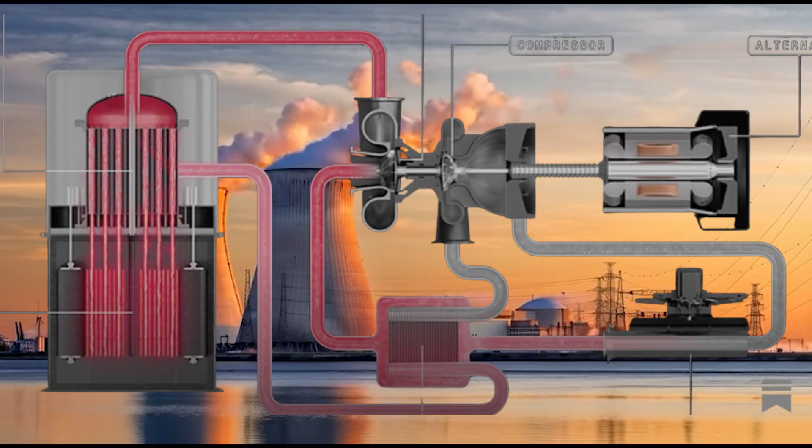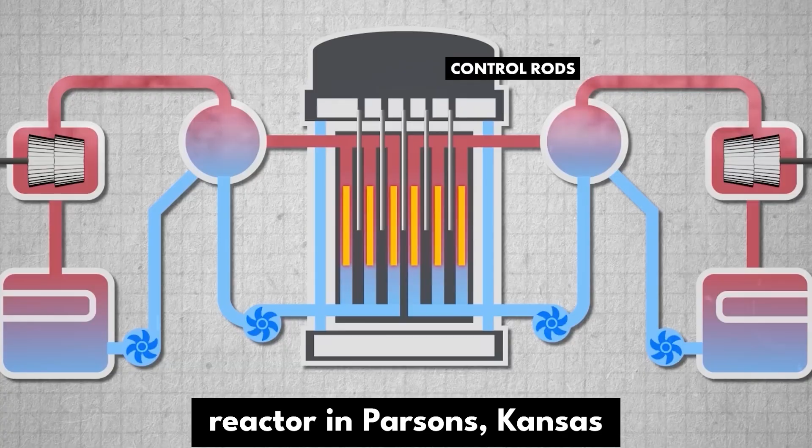Deep beneath the flat plains of Kansas, a quiet revolution in nuclear energy is taking shape. On December 9, 2025, Deep Fission officially broke ground on what is being called the world's deepest reactor in Parsons, Kansas. At first glance, it sounds like science fiction, a nuclear reactor buried one mile underground. But this project isn't about theatrics. It's about solving some of the hardest problems in energy: safety, scale, and delivering power to the places that need it most.

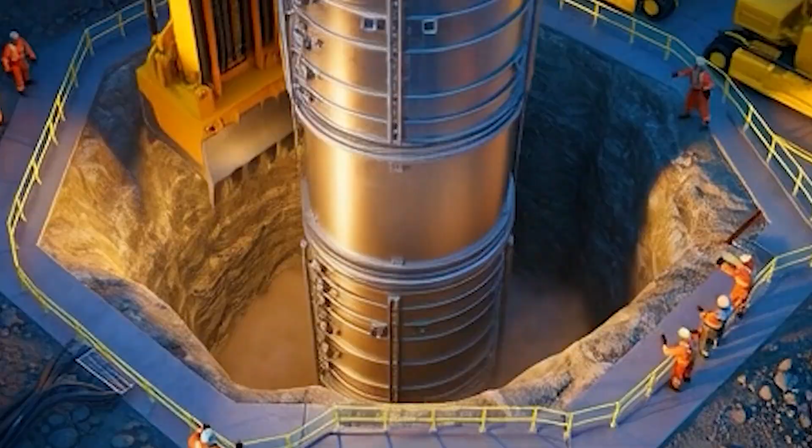The concept behind Deep Fission's borehole reactor is radical yet elegant. Instead of building towering above-ground facilities, the reactor will be constructed in a vertical shaft drilled a mile deep into the earth. This subterranean approach provides natural shielding from radiation, dramatically reduces the need for complex containment structures, and leverages the surrounding geology for passive cooling. Essentially, the planet itself becomes part of the reactor's safety and operational infrastructure.

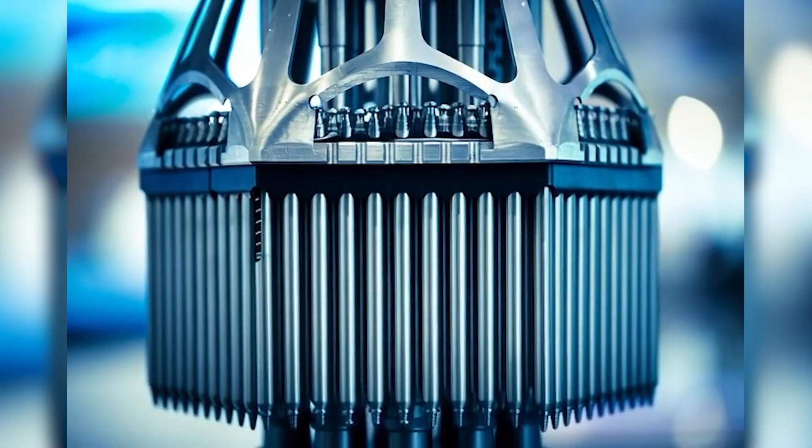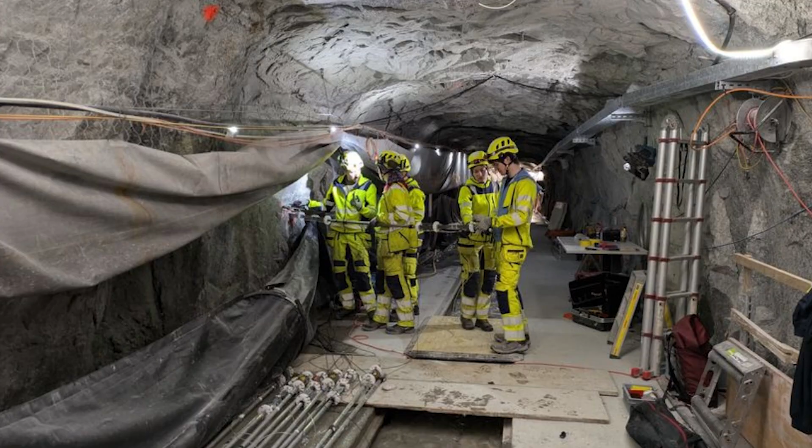This isn't just a theoretical exercise. Deep Fission's Parsons site represents a pilot project, the first step toward a much larger ambition. Their strategy revolves around modular, scalable borehole reactors that can be replicated across multiple sites. By going underground, they reduce surface risk, minimize land usage, and address one of nuclear energy's biggest public perception challenges: safety.

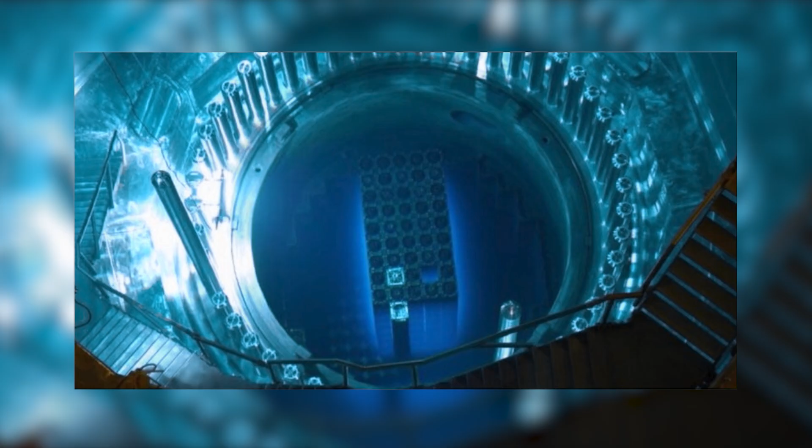For communities wary of traditional reactors, a mile-deep installation is both reassuring and practical. But safety is just the beginning. Deep Fission is already thinking like a utility of the future. The company has reportedly secured a pipeline of letters of intent totaling 12.5 gigawatts with AI data centers, signaling a new kind of customer for nuclear power.

Data centers are voracious consumers of reliable 24/7 electricity. Their operations cannot tolerate grid instability, and renewable sources alone often can't guarantee the consistency. Deep Fission's borehole reactors are designed to fill this gap, delivering constant, carbon-free power to facilities that demand reliability above all else. The underground design has multiple technical advantages.

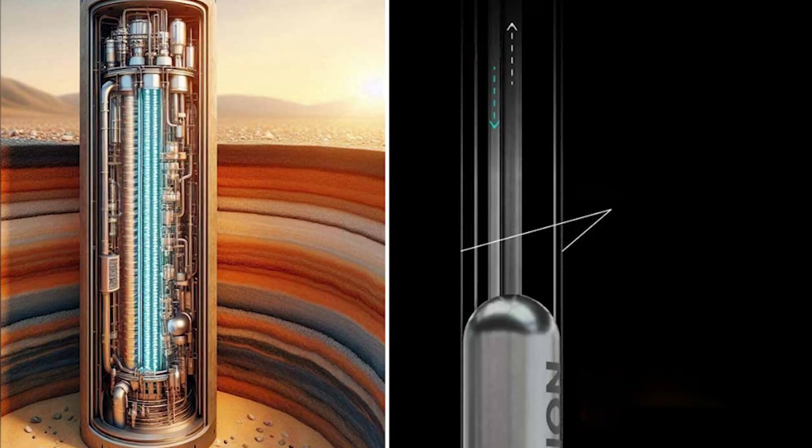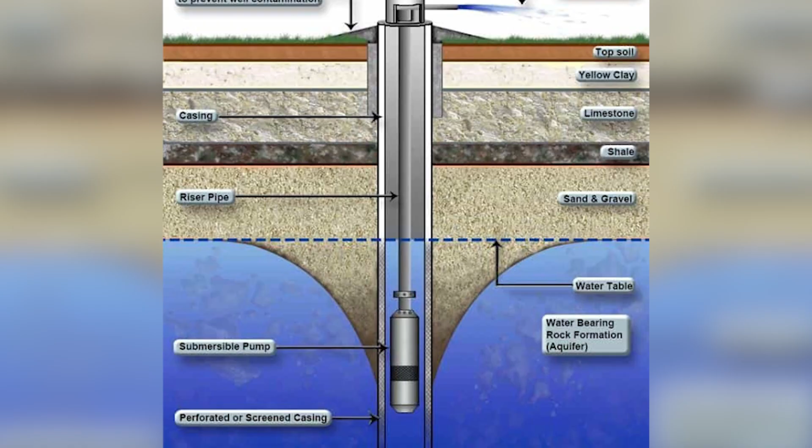By building vertically, the company reduces the complexity of heat management. Gravity and natural rock conduction assist in cooling, and the depth provides additional pressure containment, which simplifies reactor engineering. Components can be modularized and lowered into the borehole sequentially, allowing for phased assembly and easier maintenance cycles compared to traditional reactor construction.

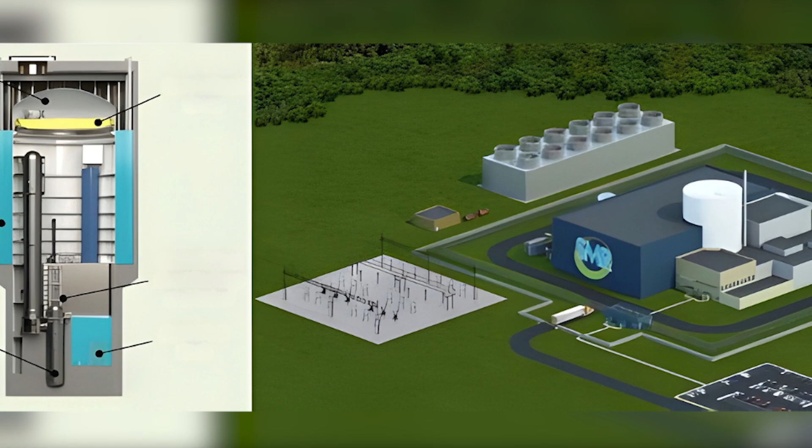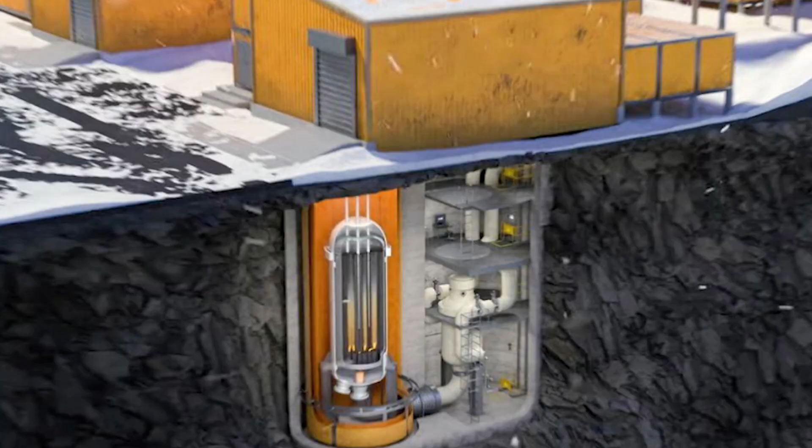Deep Fission's pilot reactor in Parsons is more than a single experiment. It's a proving ground for a potentially global energy model. If successful, these deep borehole reactors could be deployed in regions where surface space is limited, population density is high, or safety concerns make conventional reactors politically unfeasible. By burying the reactor, the company essentially creates a self-contained nuclear system, isolated from the risks of weather, accidents, or surface-level human activity.

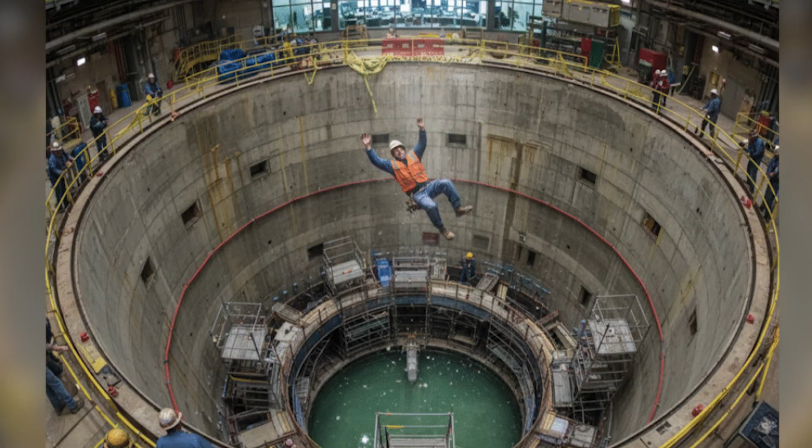The timeline is ambitious. While a mile-deep reactor presents enormous engineering challenges, the company's phased approach, starting with a pilot unit, allows them to refine the technology, demonstrate operational safety, and build credibility with regulators and investors. This is a critical step because nuclear projects live or die on their ability to navigate regulatory approval. Deep Fission's underground approach may streamline certain safety certifications while adding new complexities for geotechnical assessment.

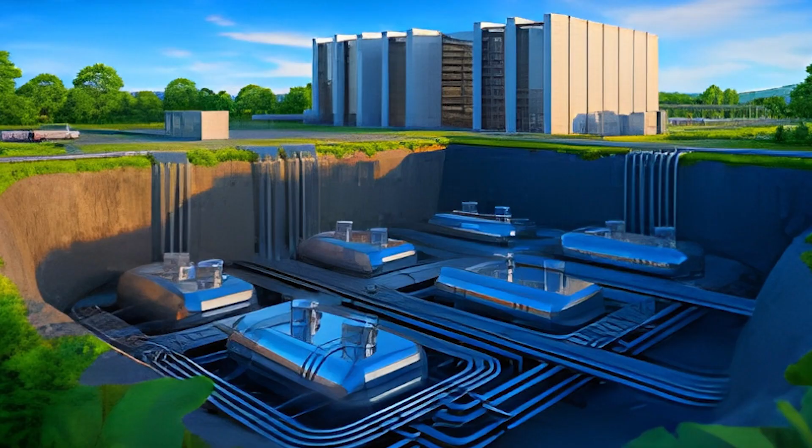One of the most interesting angles of this project is its alignment with AI infrastructure. Data centers are increasingly looking for on-demand, carbon-free power solutions. Solar and wind can't reliably deliver continuous, high-capacity electricity, and traditional reactors are slow to deploy. Deep Fission's underground modular reactors could offer AI companies a near-instant solution to scale their operations sustainably.

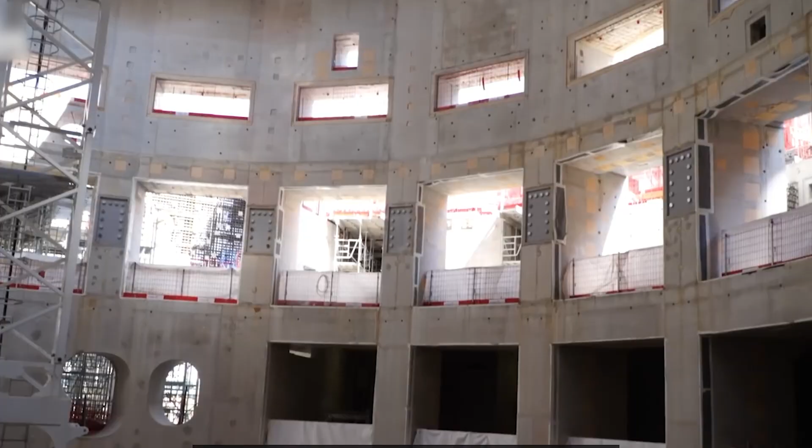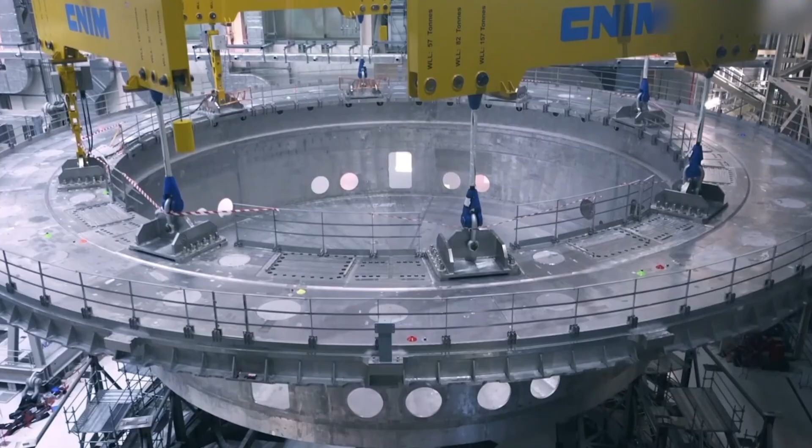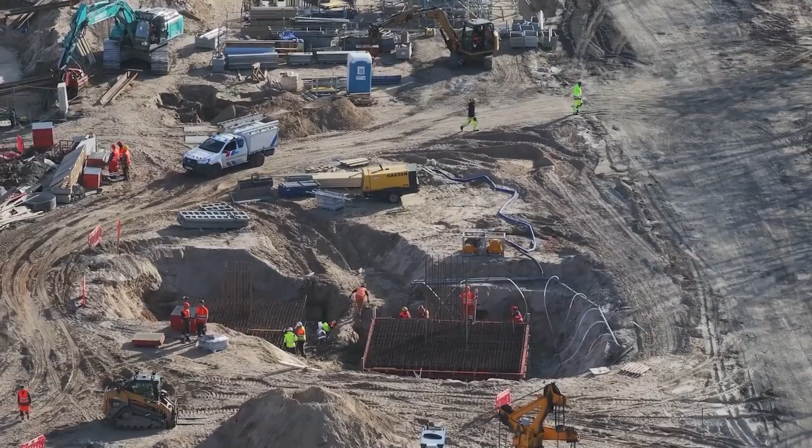The 12.5 gigawatts in letters of intent isn't just impressive. It signals a market-driven validation of this unique approach. From a financial perspective, the Parsons groundbreaking and the subsequent pilot deployment show that investors are willing to fund truly innovative nuclear strategies. Unlike surface reactors that compete for land, permits, and public approval, the underground model could accelerate deployment timelines while offering enhanced safety and lower operational risk. That combination is compelling in an industry historically burdened by skepticism and delay.

The borehole method also introduces operational efficiency. Modular components can be pre-tested above ground, then lowered into the shaft and connected systematically.

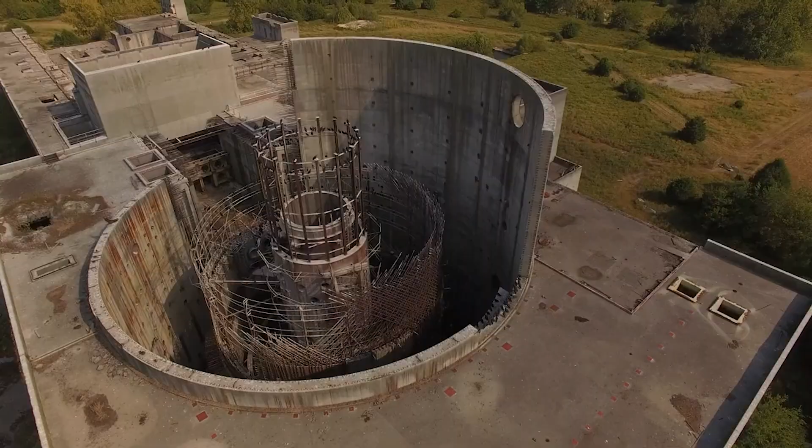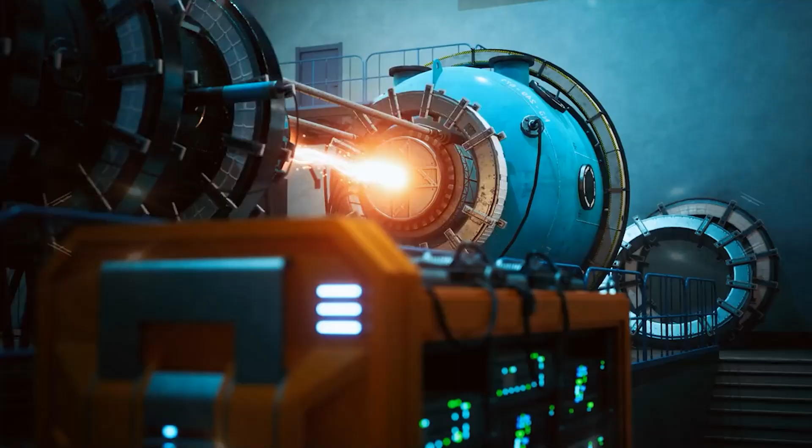This reduces assembly errors and allows for rigorous quality control at each stage. Traditional nuclear construction suffers from on-site customization and iterative adjustments, often leading to multi-year delays. Deep Fission's strategy seeks to eliminate these inefficiencies by turning reactor construction into a precisely orchestrated industrial process.

Another advantage of burying reactors underground is resilience. Surface infrastructure is vulnerable to weather events, natural disasters, or even targeted attacks. A mile-deep installation inherently mitigates these risks, offering not just safety from radiation, but security and reliability. For high-value customers like AI data centers, that added layer of resilience is extremely attractive.

It's also worth noting the symbolism of Kansas in this story. Traditionally, the state isn't associated with cutting-edge nuclear research, but Deep Fission has chosen Parsons for its geology, regulatory environment, and access to critical infrastructure.

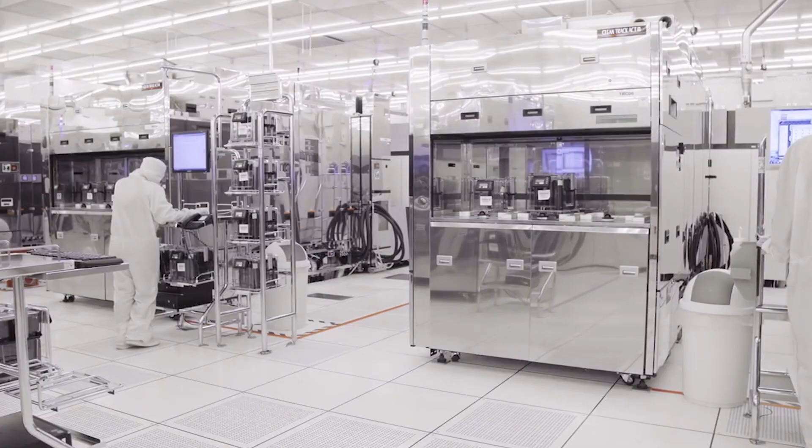This highlights a growing trend. Innovative energy solutions are no longer confined to coasts or tech hubs. The energy revolution is happening where conditions are right, not just where headlines are made.

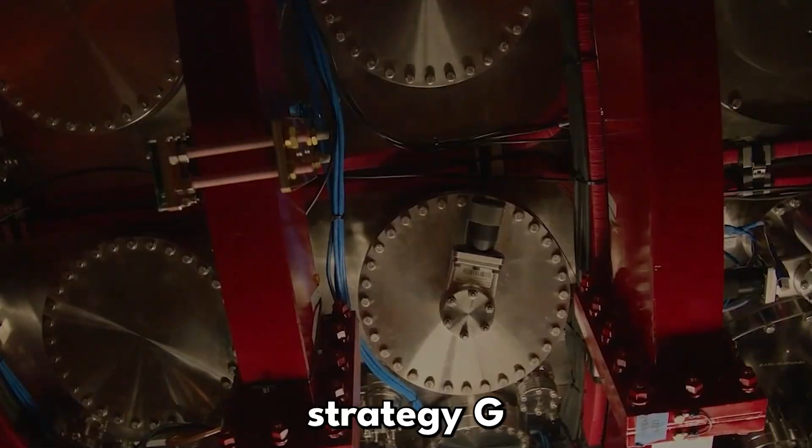For the broader nuclear industry, Deep Fission's strategy could be transformative. By demonstrating that reactors can be safely constructed underground using a modular approach, they may redefine public perception and regulatory pathways. Communities that were hesitant about traditional nuclear projects may be more receptive to borehole reactors, opening doors to deployment in previously off-limits areas. Of course, challenges remain.

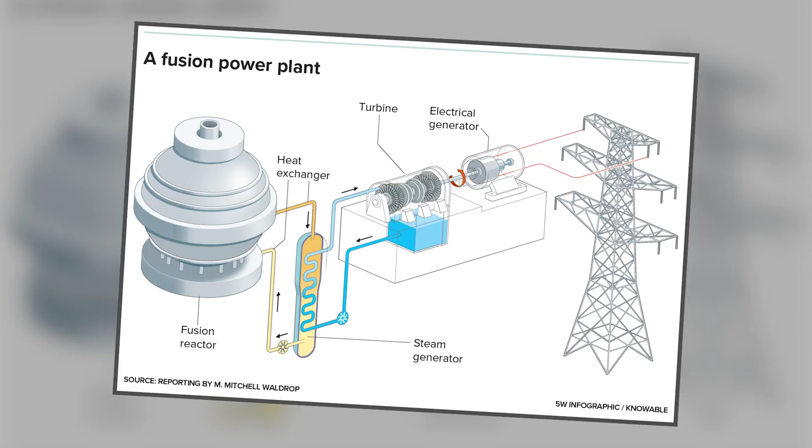Drilling a mile into the earth, managing the unique thermal and structural loads at that depth, and integrating the reactor with grid infrastructure are non-trivial tasks. Delays and unexpected engineering hurdles are almost guaranteed, but the potential payoff, a safe, scalable, and reliable nuclear energy model that can meet the needs of modern, data-driven economies, is enormous.

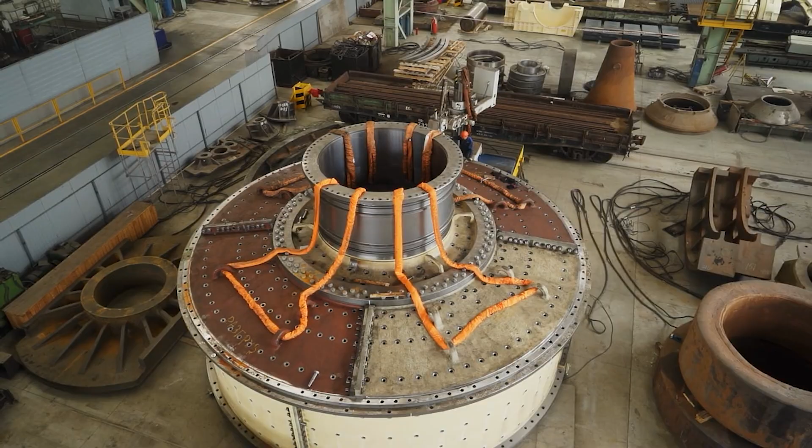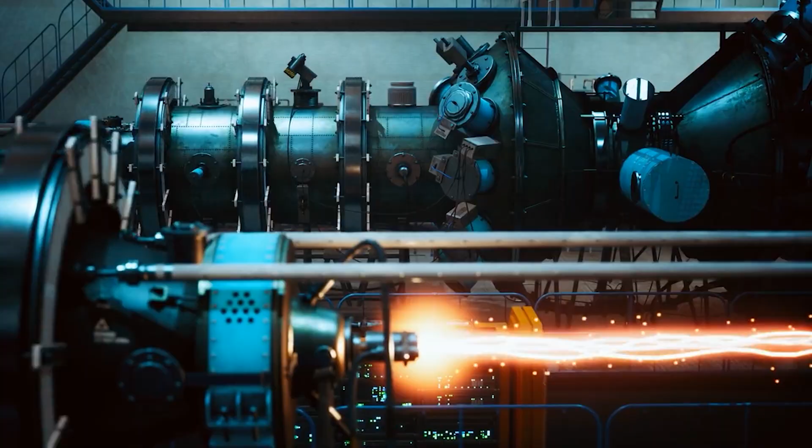The Parsons groundbreaking is more than ceremonial. It represents the first tangible step toward operational underground nuclear reactors. Each cubic foot of excavated rock, each modular component lowered into the borehole, brings the vision of continuous, reliable, and carbon-free electricity closer to reality.

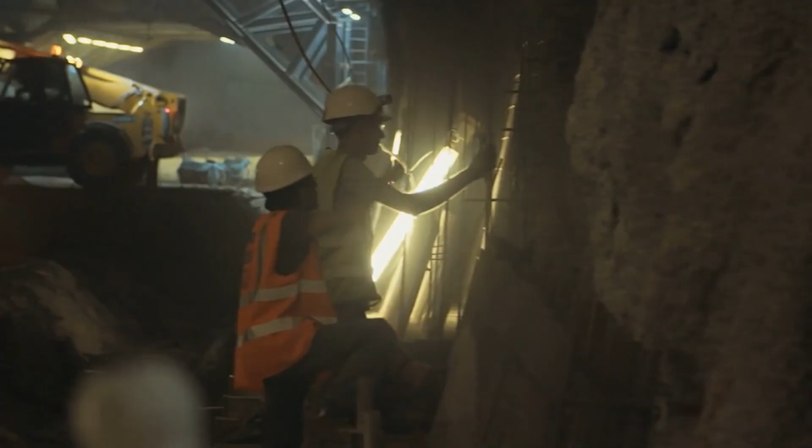Here's a question for you. When you think about the future of nuclear energy, do you picture towering cooling towers and massive surface plants? Or do you imagine discreet, underground installations powering the digital backbone of our economy? Deep Fission is betting on the latter, and their investors, their customers, and their engineers are all placing their faith in this unconventional vision.

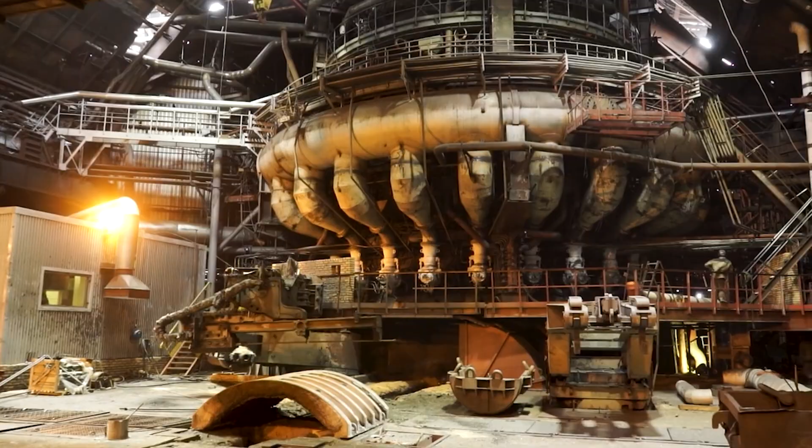The scale of ambition is clear. With 12.5 GW of preliminary commitments from AI data centers, Deep Fission is not just testing a concept, they're aiming for immediate commercial relevance. These early customers will be the proving ground, showing that underground reactors can provide both scale and reliability to industries that cannot tolerate downtime.

In the months and years ahead, all eyes will be on Parsons. Will Deep Fission's mile-deep pilot reactor deliver on its promise? Can modular borehole reactors meet the rigorous standards of safety, efficiency, and reliability required for grid integration? The answers to these questions will shape the trajectory of not just this company, but the broader future of nuclear energy deployment.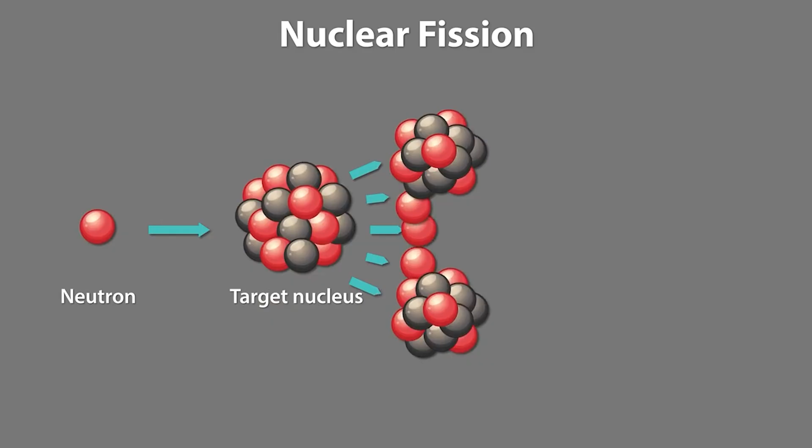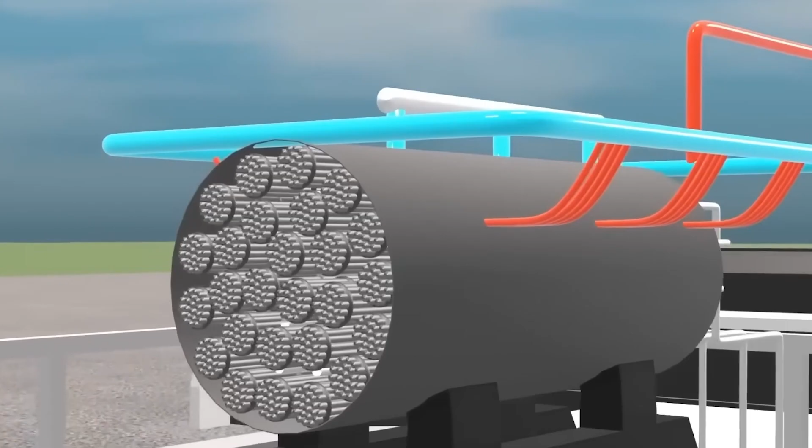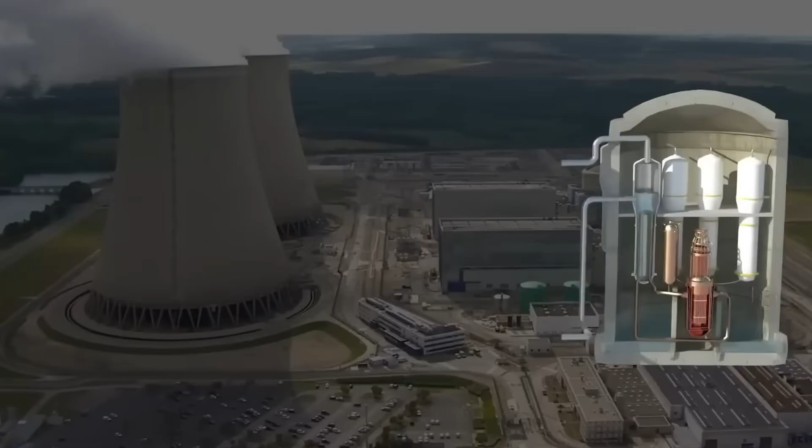And here's something to really think about. If this model succeeds, the nuclear landscape could shift dramatically. Instead of massive above-ground projects requiring decades to build and navigate public opposition, we could see replicable underground modules quietly powering critical infrastructure across the country and the world. That's a paradigm shift in how we think about nuclear energy, risk, and industrial strategy.

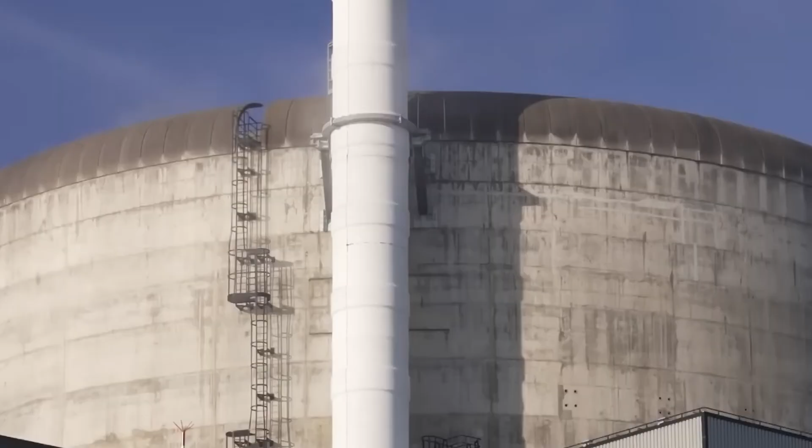Deep Fission's Parsons project is bold, risky, and ambitious, the kind of initiative that could either redefine nuclear power or serve as a cautionary tale for what happens when physics meets logistical complexity. But the fact remains, a mile underground, the future of nuclear energy is literally being built.

The next few years will reveal whether Deep Fission's borehole approach is the missing link between concept and reality. One thing is certain, the world is watching, and if successful, Parsons, Kansas won't just be a site on the map. It will be the blueprint for the next generation of nuclear energy.